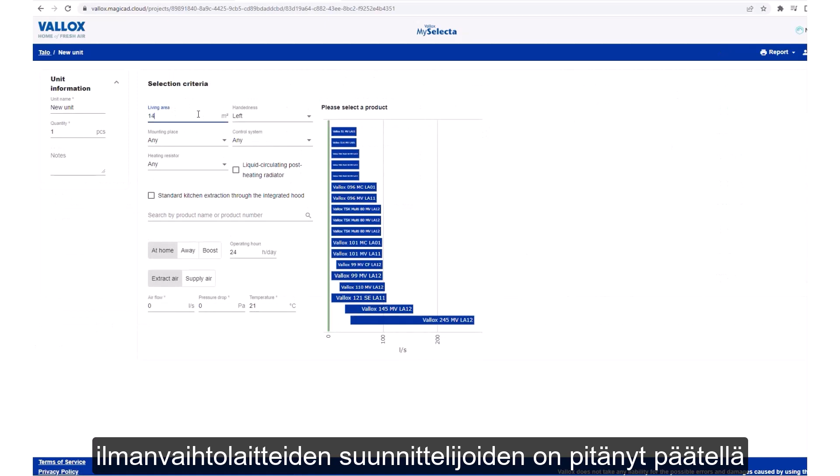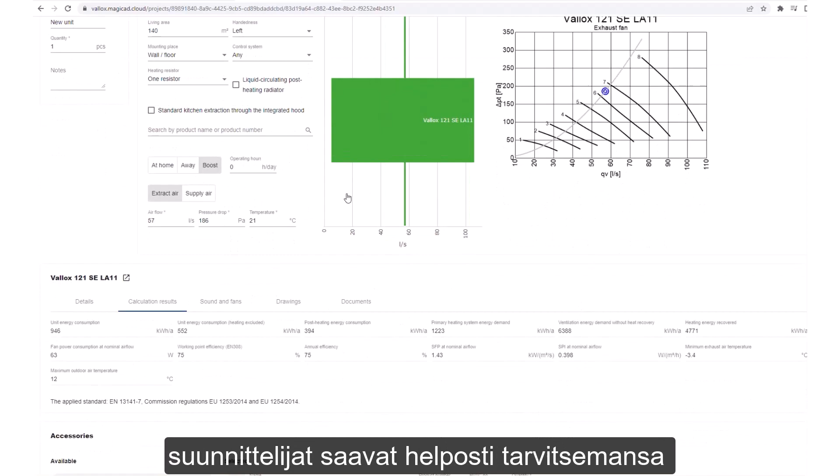The data for every possible operating point is not possible to include in the unit's technical documentation, so ventilation designers had to manually check and guess the needed information, such as unit fan power consumption, unit thermal efficiency, and sound levels from different documents. We wanted to make designers' lives easier and started looking for options for a digital tool providing all the data. By using the Vallox MySelecta selection software, ventilation designers can easily obtain the needed information exactly at the correct operating point.

MagicAD is very widely used by ventilation designers. All Vallox ventilation units are in the MagicAD cloud database and can be used in MagicAD for AutoCAD and MagicAD for Revit. We wanted the selection software output to be 100% the same as in MagicAD. For that reason, cooperation with MagicAD Group was a very natural solution from Vallox's point of view.

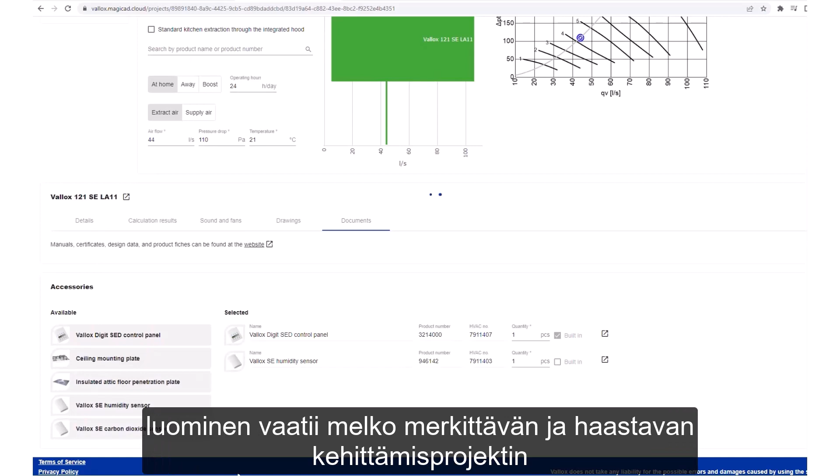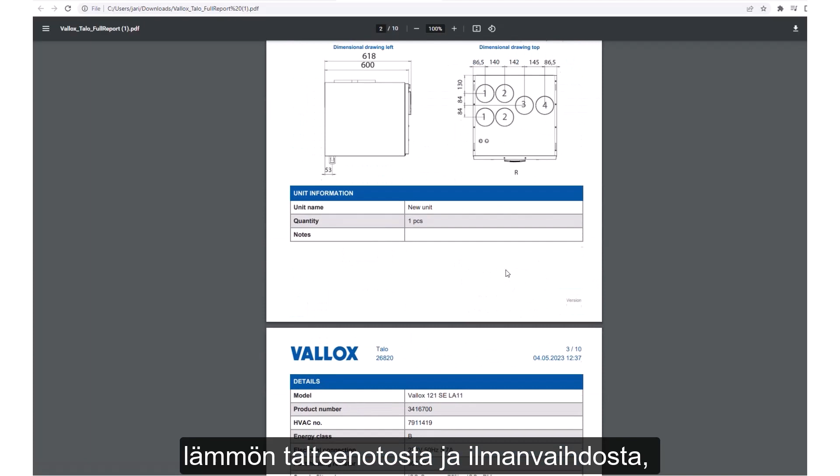Creating a selection software for quite an extensive product range means the development project is also quite extensive and challenging. However, MagicAD Group had so much in-depth knowledge about heat recovery units and ventilation that we didn't have to explain every detail to them, which made the project fairly easy for Vallox. Overall, Vallox MySelecta software was up and running within the planned timeline and also within the planned budget.

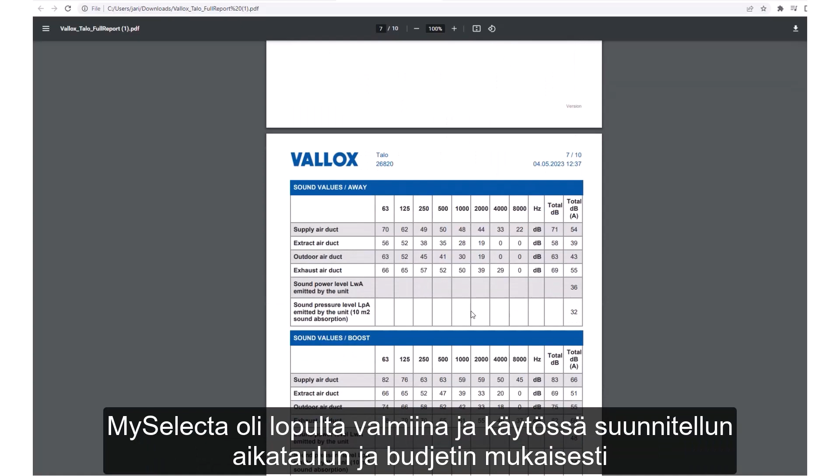We are using Vallox MySelecta to calculate the technical data presented on the Vallox website. It's also a very important tool to make comparisons between our units and the competition, and to develop our units based on the data.

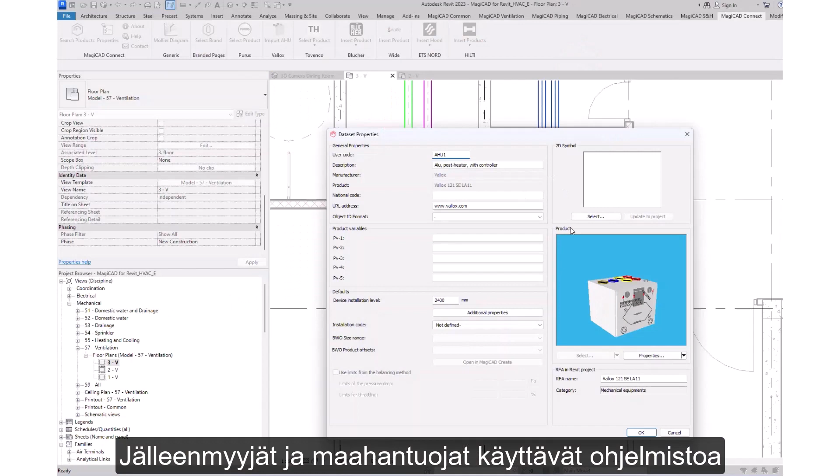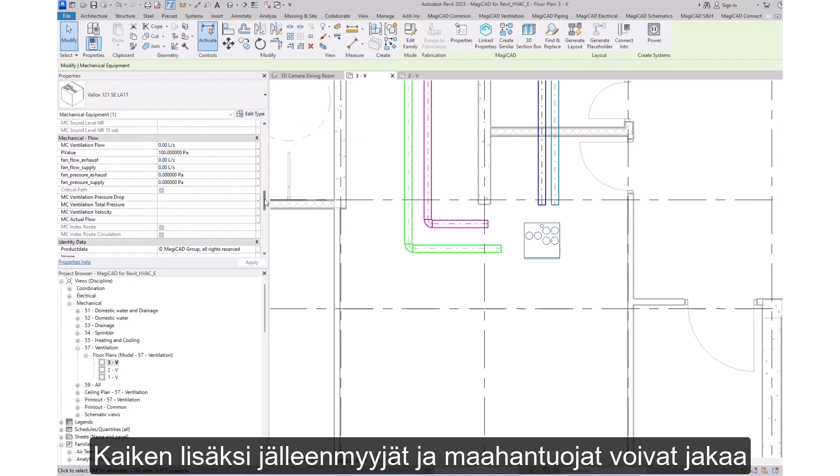Resellers and importers utilize the software in serving their customers and making quotations. Usually, they already know at that point what will be the needed airflows and pressure losses in the ducts. So at first, they use MySelecta to select a suitable unit from the Vallox portfolio, and then quickly get the exact technical information for the operating point in question. Last but not least, they can either share the project information directly with their customers, or export a full report out from MySelecta.

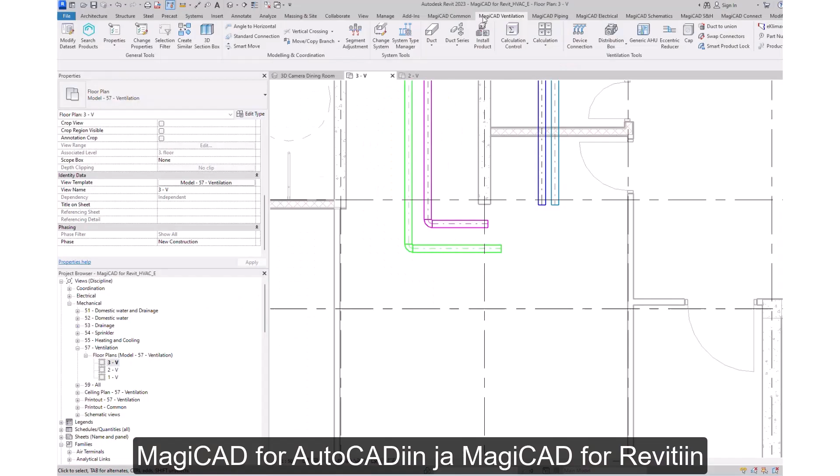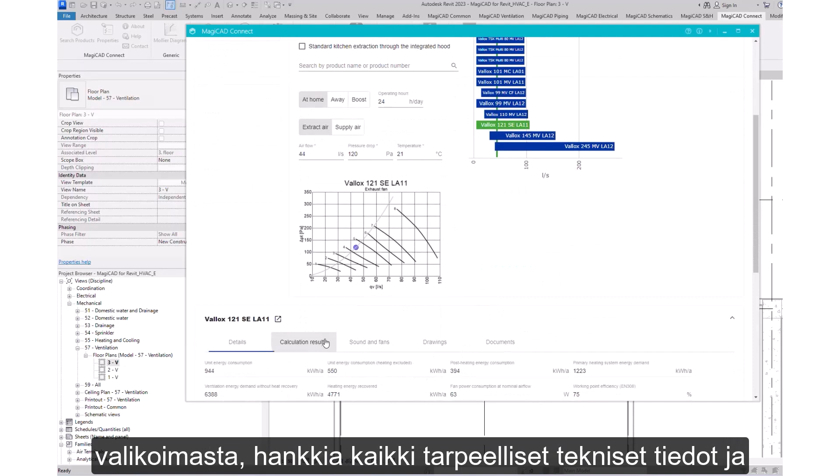Vallox MySelecta software has a two-way integration to MagiCAD for AutoCAD and MagiCAD for Revit, enabled by MagiCAD Connect. When the ventilation designer has dimensioned and set up the airflows, he can use direct access to Vallox MySelecta from AutoCAD or Revit. Then it's possible to select a unit from the Vallox portfolio, get all the necessary technical information and reports, and export the selected unit directly back to AutoCAD or Revit. Since the designer can also create a project for Vallox MySelecta beforehand, he can get the correct unit to AutoCAD or Revit with just a few clicks of his mouse. And this is very convenient.